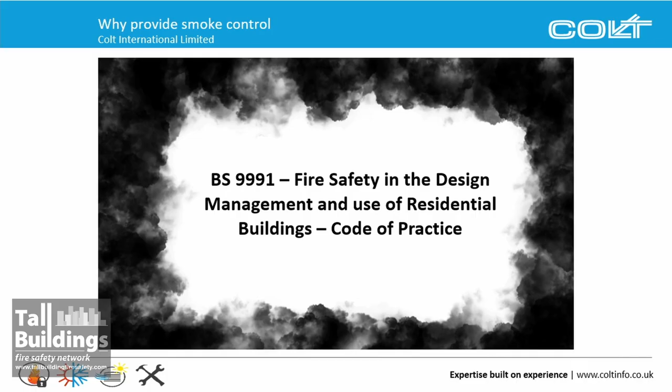Quite a mammoth task. It's a standard that will never be perfect, and people will always have an opinion on how to make it better. But fire safety in the design, management and use of residential buildings, a code of practice, it's so important. What we've talked about with Elspeth and Ben is the built environment and how people manage existing buildings, but this is how buildings are being built, and hopefully, having listened to some of the presentations this morning, we'll see that things are actually improving in the right direction.

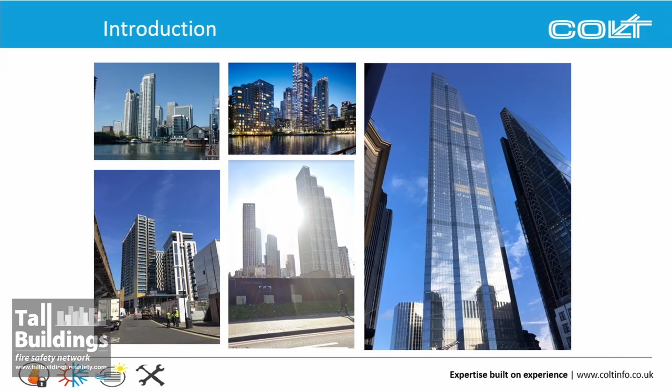So as buildings are getting taller, and so much taller, particularly when you look out the windows here, making sure that people can evacuate safely or are safe within the buildings is of utmost importance. So considerations and challenges for the committee start with the changes to legislation that we've had since the last version of the standard. Obviously, we have the Building Safety Act bringing in sprinklers over 10 metres, single-stair residential buildings up to 18 metres only.

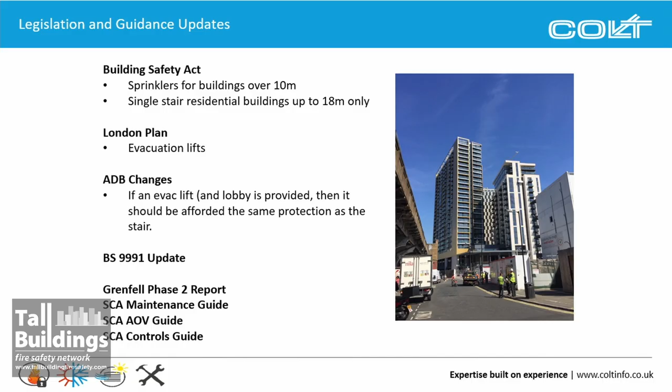The London Plan with evacuation lifts we've heard a lot about already. Changes to Approved Document B didn't go as far as saying we need evacuation lifts, but if you have one, then it should be afforded the same protection as a stair. Very sage advice, I guess, but no real content to it.

So now we've got the 9991 update, which has considered both the Phase 1 and Phase 2 reports, and the Smoke Control Association information on maintenance, which is coming out very soon. They put some guidance out on automatic opening vents and also on control systems for smoke control systems. And you'll guess, because of my background, that this is going to be a little bit of a smoke control orientated presentation, but I will try and cover the majority of the content.

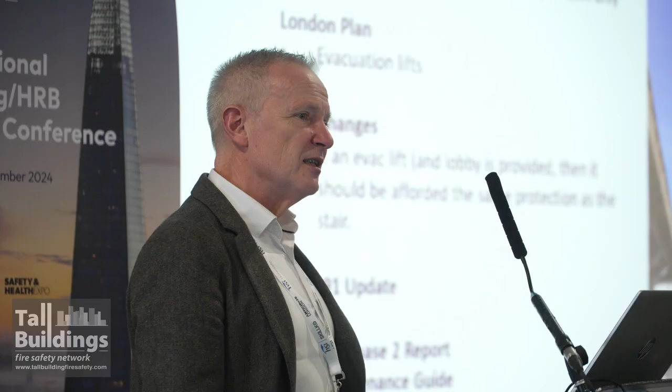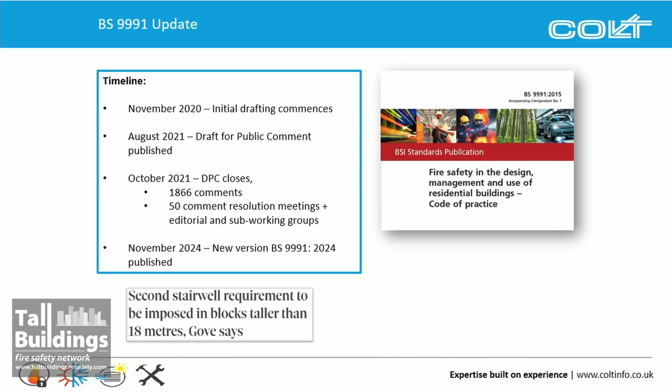So the standard went out for initial drafting in 2020 based on comments that had been received over the previous years. In August 2021, that drafting was complete and it went out for public comment. Just a couple of months later, the comment period closed with nearly 1,900 comments. A committee was set up to review those comments and either action them or justify why they wouldn't be actioned. That ended in 50 days of meetings, both editorial and technical, to resolve all those comments. Not all were taken on board, some were rejected.

But obviously, Michael Gove had already said that a second staircase would be required in HRBs greater than 18 metres. So from Paul's presentation this morning, that is within the standard. 18 metres is the cut-off limit that NFCC wanted, that RIBA wanted for residential buildings.

I've got to admire Russ's clairvoyance here, because it was back in April when he asked me to come and speak at this event, not knowing then that it would be published last Thursday. So it's very opportune to be speaking at this particular time.

And handily for me, at the beginning of the standard, I'm sorry about the small print, it does actually give us a list of some of the main changes. While it's a very brief list, the highlights would be that the scope's been expanded to cover residential care homes. There was a lot of vague guidance for residential care homes, so that's kind of been distilled out. So there's an absolute new dedicated section for residential care, and some definitions for residential care as well.

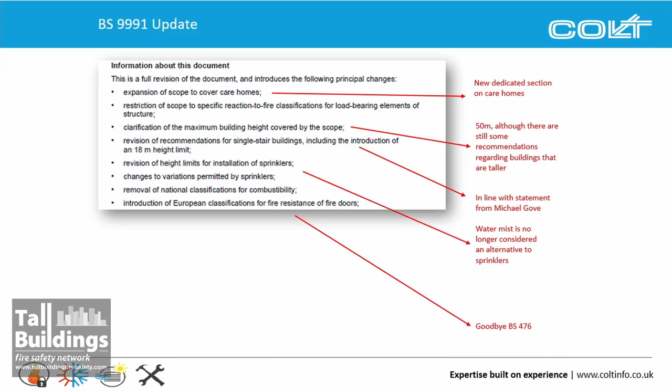Some of the standards, I'm sort of jumping around a little bit with them, is leading towards the demise of the BS 476 standards. While there are still references to them in the standard, they are kind of being phased out. So that covers the reaction to fire classifications for load-bearing elements as well.

There's clarification on the maximum building height covered by the standard. It is 50 metres, the maximum building height it will cover. There is some additional guidance within there for buildings over 50 metres. But once you go over 100 metres, it goes down the fire-engineered QDR type process. The big one, obviously, an additional staircase for buildings over 18 metres, in line with Michael Gove's statement.

And I guess it's easier to say what's not in here, and the one thing that's not in this standard is water mist. There was no agreement on how water mist could be designed in residential buildings without a test report that covered every single application, and so it was decided that we could not be recommending water mist within the standard.

One of the big changes, I think, really is the updating recommendations for smoke control, and the introduction of recommendations for evacuation lifts, which again is something that we're hearing a lot, both today but probably yesterday as well. So there is some more clarity within there as to evacuation lifts, how to plan for them and how to design for them. Basically, if you need a lift, or if a lift is provided to get into a building, then a lift should be provided to get out of the building. So it's level access for everybody.

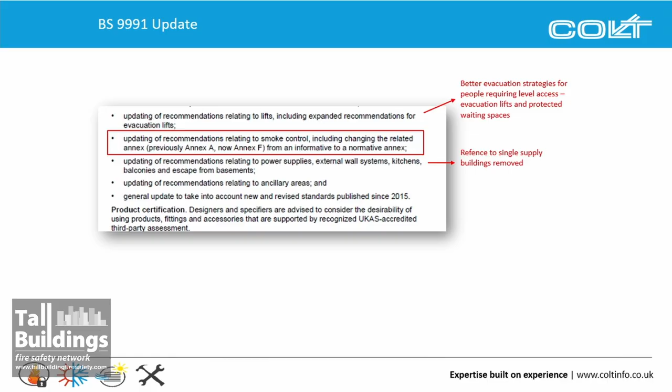And the other main change there really was the update of references to power supplies. Under the old version of 9991, there was a requirement for a standby power supply, but there were get-out clauses if you didn't think it was practical. Now there isn't a get-out clause for not providing a secondary power supply, be that from an alternative substation or from a standby generator.

A bit on product certification and some general updates. I mean, obviously it's quite a complex standard and it's really difficult to get all the details out of it in half an hour. So forgive me if I have jumped to the areas that I'm more familiar with, shall we say.

So dealing with means of escape, some areas haven't changed. Travel distances are pretty much the same: up to 11 metres, single stair, 4.5 metre travel distance with an automatic opening vent at the head of the stair or on every landing as we had before. From 11 to 18 metres, again, single stair is permitted with a travel distance of 7.5 metres, but obviously with most buildings being sprinklered. I'm sorry, some of the formatting seems to have gone astray in my presentation. So travel distances with sprinklers are 15 metres.

One of the significant changes is that travel distance is measured not from the apartment door to the lobby, but from the apartment door to the stair, which is a big change from the old standard, because we found there were a lot of people trying to game the system by putting a tiny little lobby outside the apartment or a great big lobby outside the staircase. So we were getting more and more travel that was kind of cheating, really, in terms of the intent of the limit of travel distance. So now that travel distance is measured from the apartment to the stair door.

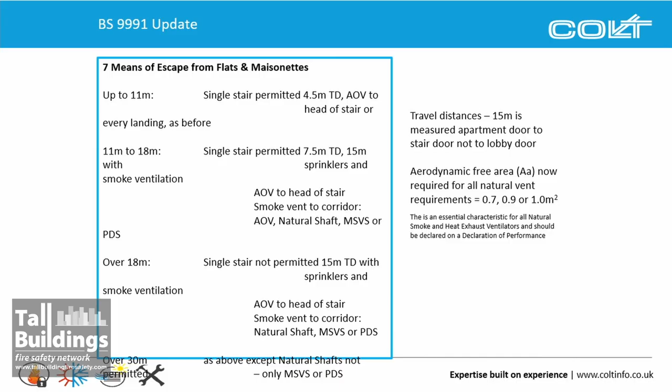So in our 11 to 18 metre range, we can have an AOV to the head of the stair. We need smoke ventilation to the corridor, which can be AOVs on an outside wall. By AOVs, I mean automatic opening vents. It can be a natural shaft within the corridor with dampers on every level, or a mechanical smoke vent system, or a pressure differential system.

Once we go over 18 metres, obviously, now we're into the range of multiple stairs, and the same requirements apply. We're no longer permitted a single stair, but 15-metre travel distances and the same ventilation requirements. What you possibly can't see at the bottom is that over 18 metres, the automatic opening vent to the corridor has now come out.

So that's not an option. If a smoke control system is designed to keep the staircase clear of smoke, or to provide an ability to vent smoke out of the building, there was no evidence to suggest that in taller buildings, where wind pressures may be more prevalent, AOVs provide a sufficient level of performance to assist escape.

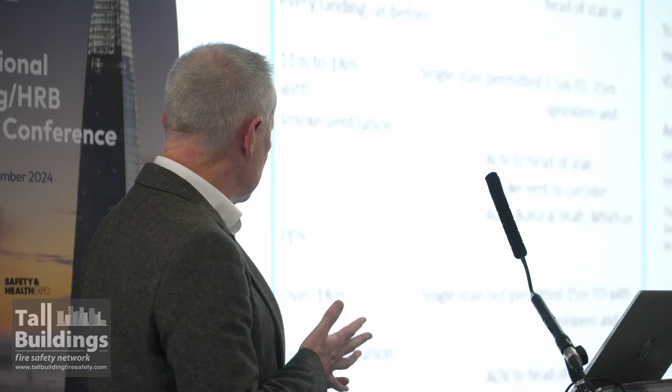So natural smoke shafts, mechanical systems or pressure differential over 18 metres, and then over 30 metres, again, the natural shafts have been taken out. It's only mechanical or pressure differential systems over 30 metres.

And a change to the requirements for automatic opening vents is that we've gone from having this concept of minimum free area that appeared both in Approved Document B and the old standard, which was a very vague calculation of what we thought the area of the ventilator might be, to a defined classification of the aerodynamic free area, which you establish by putting your product in a wind tunnel and measuring its performance. And that's part of the classification of the product that would be a certified product.

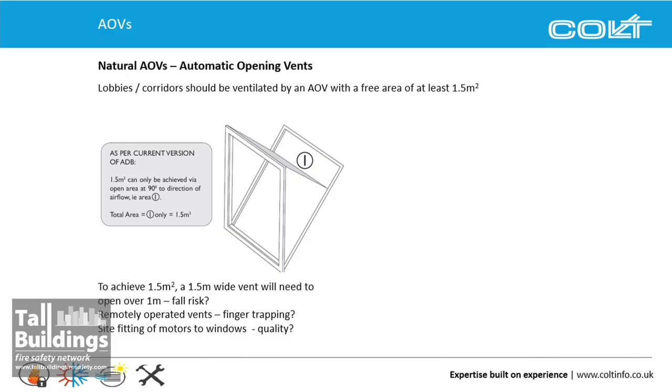And one of the drivers for this was to stop people taking a chain drive, sticking it on a window and calling that an automatic opening vent. It's not, and we'll cover that. The old standard said that area, or area 1 on that diagram, would be the minimum free area. So if you wanted 1.5 square metres minimum free area, you needed a 1.5 metre wide vent that opened a metre.

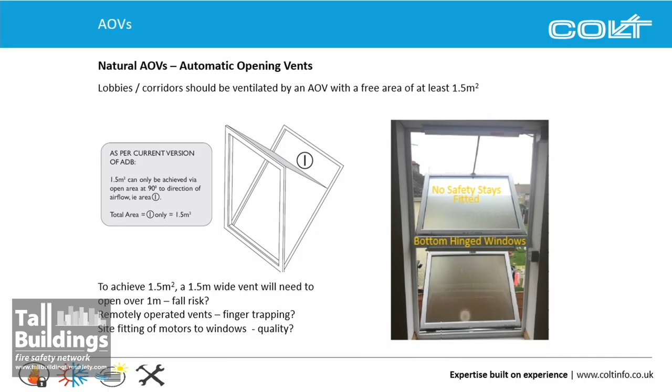That led to a whole load of issues with, as I say, people putting chain drives on normal windows, which not only have limited performance, but also, in the example you see, there's no safety stays, so if the chain drive becomes disconnected, it could fall, shatter, and harm people at low level. There's no control in regards to finger trapping, not always a problem, but obviously there's a real quality issue.

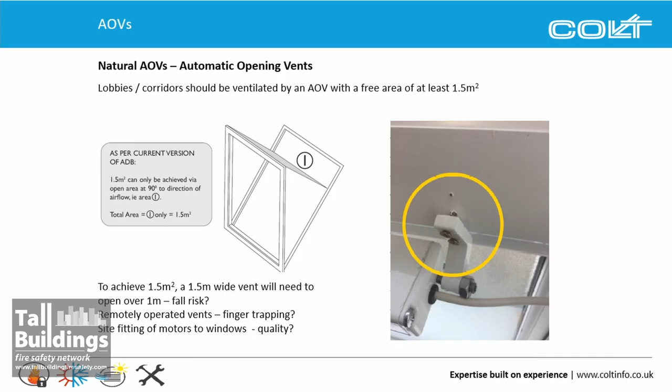And when you see some of the actuators fixed to PVC surrounds or timber frames, the ability of these to perform over a long period of time is quite limited. So the aim was to get away from, I don't want to use the phrase Heath Robinson, but on-site constructed ventilators to proper certified product. So we didn't have these great big sheets of glass hanging by a couple of Tek screws.

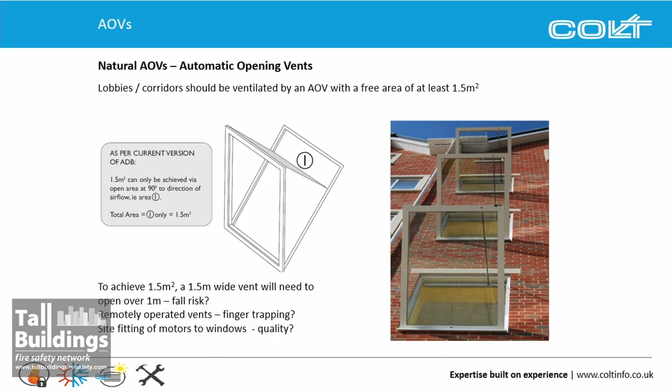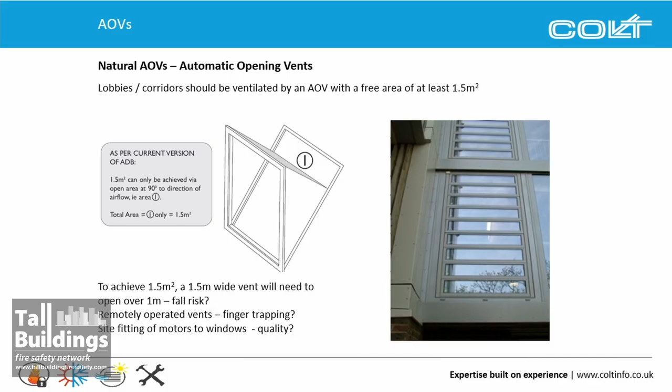So a smoke control ventilator is CE marked to a standard, and that aerodynamic free area is part of the declaration of performance for that product. The components are tested together for reliability, robustness, resistance to heat, and if they're on the roof, to be able to throw off snow and to operate under wind. So it's quite a key change to move away from, as I say, chain drives and windows.

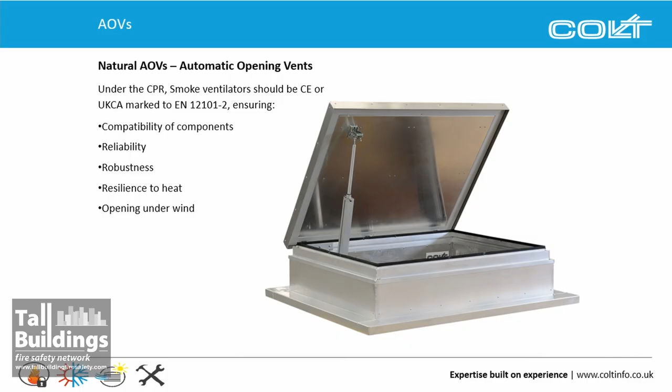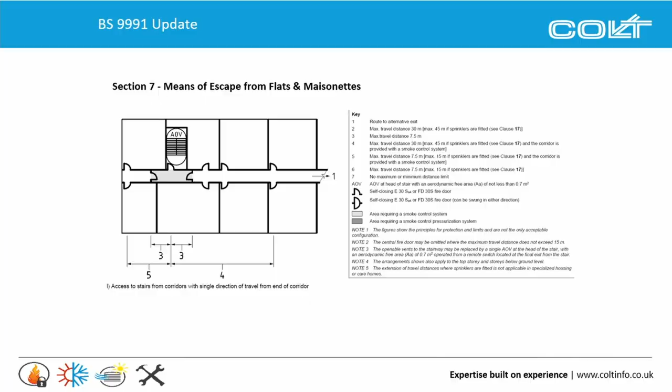So where do we use these? Obviously, this is the corridor. We've got a staircase at the end of the corridor. The furthest apartment to the staircase, assuming it's over 11 metres and sprinklered, will be 15 metres. The shaded area is where the smoke ventilation is provided, and as I say, the travel distance is to the stair door, not to the lobby.

A couple of points on section 7, which covers lifts and evacuation lifts. Buildings that are provided with passenger lift access to an upper or lower level should also be provided with a means of using lifts for escape. As I say, you need a lift to get in, you've got a lift to get out. And then at least one evacuation lift should be provided for each escape stairway. So you've got 2 stairs, you need 2 lifts. There is a possibility of putting that alongside firefighting lifts, which will become clear as you start to design buildings to the standard.

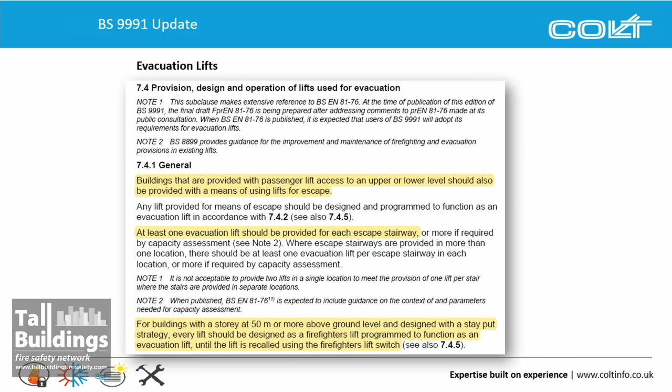A couple of other things to point out there. For buildings with a storey 50 metres or more above ground level and designed with a stay-put strategy, every lift should be designed as a firefighter's lift, programmed to function as an evacuation lift until the lift is recalled by the firefighters. So there's some extra resilience there as well.

It does obviously beg the question, how do you design an evacuation lift? And of course that doesn't quite exist yet. And note 2 there refers to BS EN 81-76, which is the evacuation lift standard, which is being rushed through the CEN process as we speak, hopefully. Because it is very hard to get lift manufacturers to certify a lift that doesn't do what it was originally designed to do, which is ground in the event of a fire.

When we look at the position of the lifts, there are a number of issues, because every lift should have an evacuation lift lobby or waiting space. I'm not sure the exact term we call it, but in each of these examples we can see different requirements. So in the top one, the lift is actually in the staircase and the waiting space is in the stair. In the second one, the lift is in the lobby. Again, the smoke control is in with the corridor lobby as well.

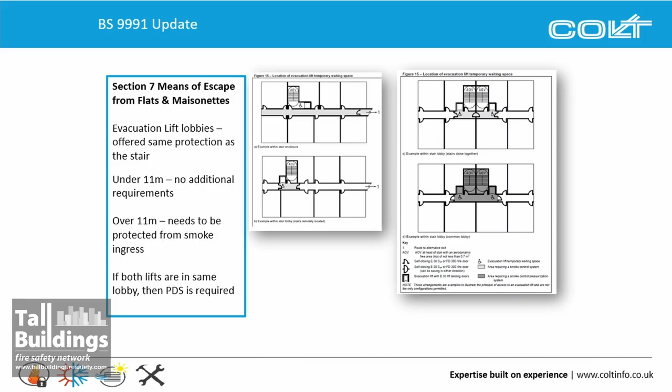In the top right one, we've got the two staircases side by side with a door in between. We've got two staircases, we've got two lifts, and we've got two waiting spaces. So again, normal smoke control requirements apply to that one. In the final one, they've taken out the door between the two lift lobbies. In that instance, it's requiring pressurization. So a pressure differential system will be provided when there's no separation between the two evacuation lifts.

So what does that mean? So the evacuation lift lobbies, or the waiting spaces, should be offered the same protection as the staircase. So if it's below 11 metres, we're not really offering a great deal of protection from a smoke control point of view to the staircase, so there's no additional requirements for the evacuation lift lobby in that instance. When we go over 11 metres, the premise of the smoke control systems that we're designing is to protect the staircase from smoke ingress. So the add-on is that if you've got a system that protects the staircase, it's now got to protect the lift lobby as well.

So that means we can no longer extract from that lobby. You've got to extract from the space beyond the lobby and either have inlet air coming into both the stair and the lobby, or pressurize the two. So I think what we need to understand really is which of these is the architects' preferred option. And I think there's going to be a big question about net versus gross when these start to be introduced into new buildings, and which of these options is the most viable solution.

Because at the moment, as writers of the standard, it's not clear to us how that will be taken on board. Because obviously, once all these are introduced into the building, the way to recover the additional cost, I guess, is to make the building higher. So things will eventually get a bit taller.

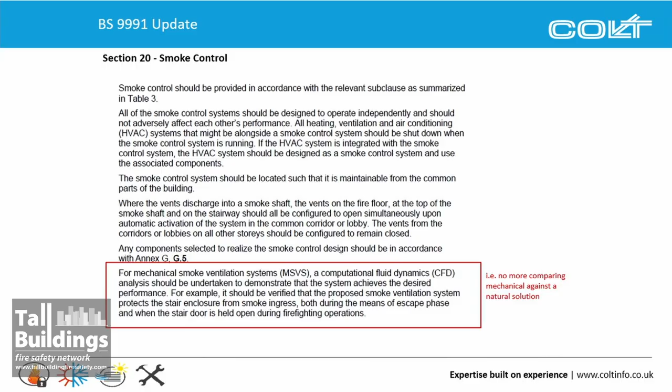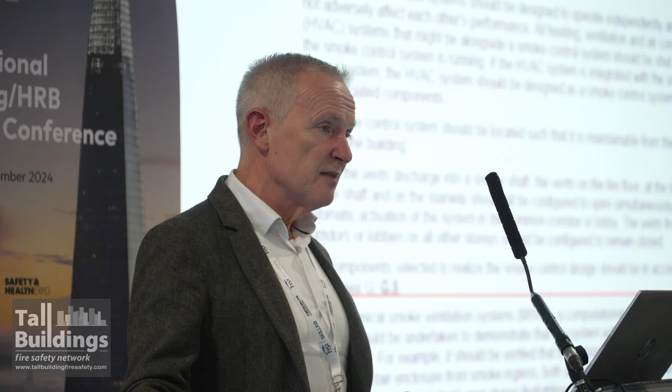So for smoke control, some big changes as well. It used to be in 9991 and in 9999, I think, that if you were putting a smoke control system in and it was going to be a mechanical system, you had to design it to be at least as good as the equivalent natural system. So the process would be, you'd calculate how good a natural AOV or a natural shaft would perform, and then you would provide a mechanical system that would do the same thing. So if it didn't perform very well, the mechanical system could be just as bad, but it wouldn't be any worse.

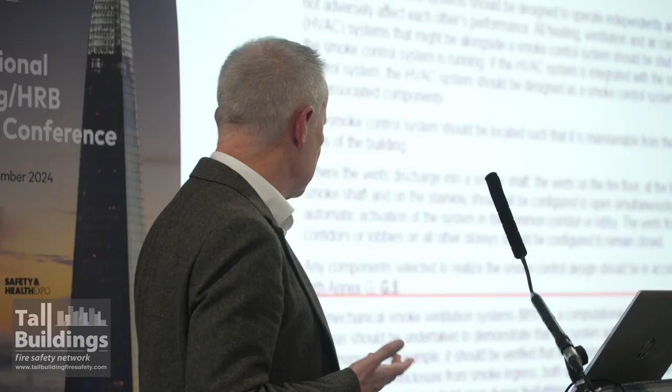Now what we're saying is that mechanical smoke vent systems need to be designed to keep the staircase clear of smoke. It's not comparative anymore, it's definitive. So that really means more modelling, I guess, and demonstrating that the performance of the system achieves the conditions we're trying to achieve. And then, Paul, I'll refer to your presentation earlier with your smoke going into the staircase. We're designing these systems to keep that smoke out of the staircase. Okay? So if you change your animation, that'd be great.

And obviously, when we look at Grenfell and the comment about the smoke control system not working, there's no evidence to suggest that the smoke control system didn't operate. It was never designed and would never have been designed for a fire of that severity.

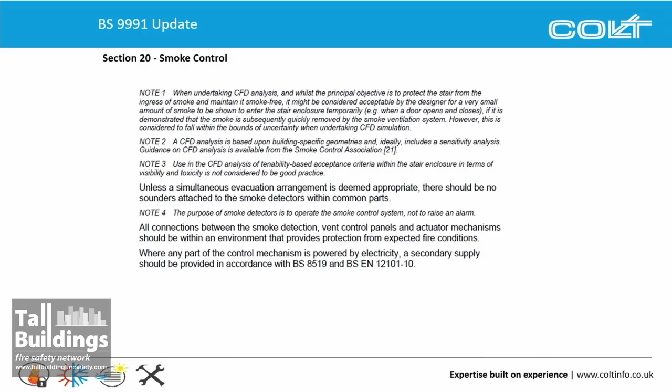So there is some guidance on CFD, and there's a lot of small print here. I've put it in so you can refer to it in the handouts. I don't suggest that we go through it, but obviously when you're doing CFD analysis, making sure that it is of the right standard and it's done by reputable and competent people is the critical point there.

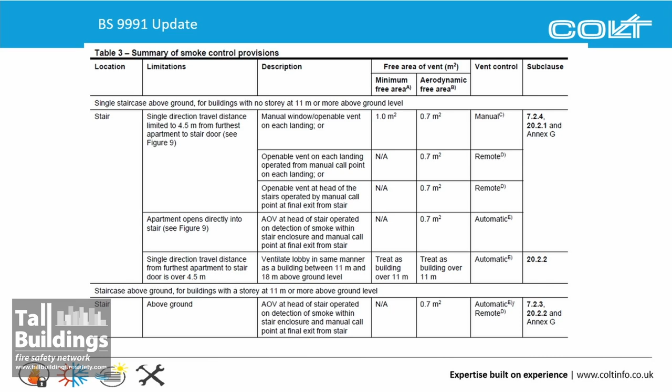So into the smoke control provisions, as I say, the requirements are very similar to previously in terms of automatic opening vents or natural shafts or mechanical shafts, but now we have these aerodynamic free areas that actually means you need to use a properly designed piece of equipment rather than just a window with a chain drive.

And the other big change is that when you get to a basement level, if your basement is more than 10 meters deep, this got lost from both 9999, I think, and 9991 before, that a deep basement could be given the same protection as any other level. It used to be that a deep basement would have staircases protected by a pressure differential system, and so now that has been reintroduced.

How it got lost from the last version of the standard is very difficult to tell, but it is now back in there, because going into a deep hole in the ground with only a staircase to get back out again to fight a fire is quite a terrifying procedure. I wouldn't like to be there myself, so having the best possible protection to that staircase is essential.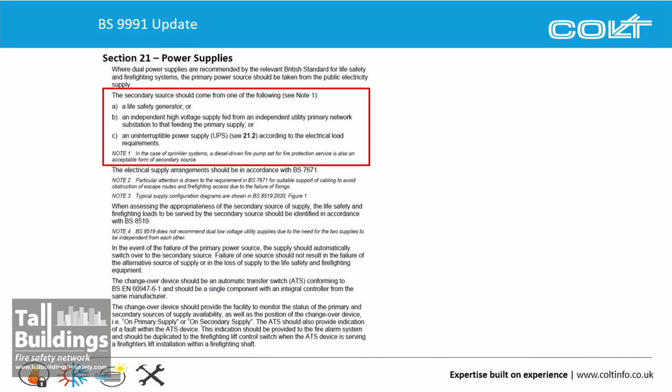Just to go over the other things that we mentioned, AOVs up to 18 meters only, natural shafts up to 30 meters only. After that, it's either mechanical or pressure differential. As we said before, power supplies: the secondary power source now should be a generator or an independent feed or a UPS. There is no option to say, well, it was too difficult, so we don't do it. It's got to be there.

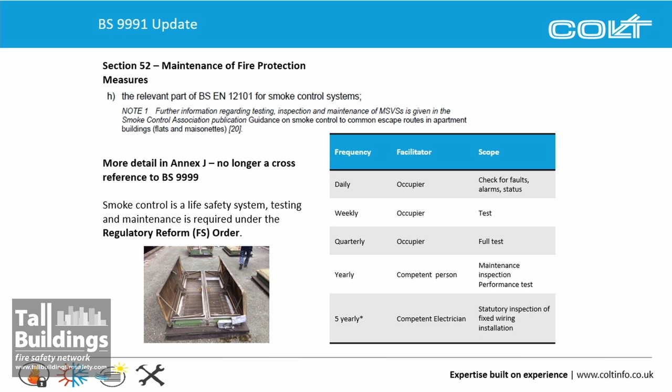Quite a bit on maintenance now. It used to be that 9991 used to refer to other standards for maintenance. It's now got its own requirements in there. And obviously smoke control, being a life safety system, testing and maintenance is a requirement under the Fire Safety Order. So what we recommend as a business, and as an association really I suppose, is that there should be daily inspections of the smoke control system, as you would with a fire alarm, just to make sure there's no faults, no flashing lights, no red lights on it, that it's ready to function.

And every week, a test, and these can be done by the occupier, the responsible person, I guess, and then every quarter a full test of the system. So if you've got a high-rise residential building with multiple floors, you test so many floors a week to make sure that over that cycle of three months all those floors are tested. And then once a year, a full maintenance inspection and performance test by a competent service provider, and obviously a 5-year electrical inspection as well.

But the competent service provider, obviously making sure that not only is the system operational, but that a sample of the cause and effect is carried out to make sure that the right system works on the right level, and it's tested from the fire alarm as well. There's a big scope gap in maintenance and testing, that people test their own things and they demonstrate it's working by pulling out the links to the fire alarm. That doesn't really prove that the cause and effect from the fire alarm is giving the right signal.

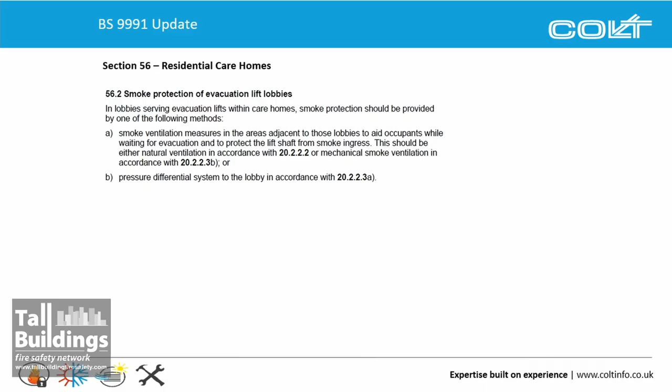As I say, residential care homes, there is a whole section 56 on residential care homes. And one of the things that is in there, it deals with progressive evacuation, but it also introduces smoke protection, including evacuation lifts for residential care homes. They've been quite neglected from what I can tell in sitting on this committee.

I won't dwell on it, but there is a simplification of the design decision tree for atria, particularly if your evacuation is through the atria or along the balconies of the atria, then that leads you to a more onerous solution.

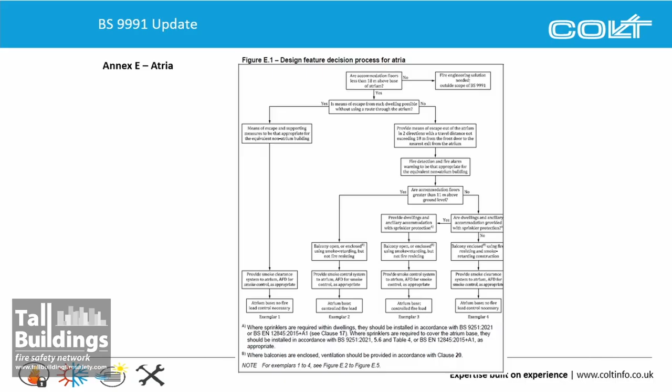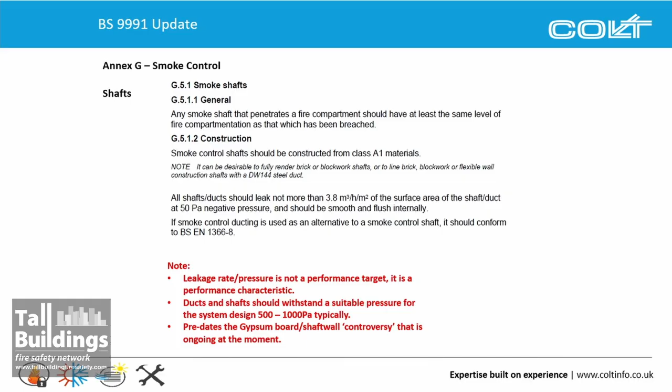Smoke shafts, big topic at the moment. Ever since British Gypsum, I think it was, withdrew their classification for shaft wall for the design of smoke shafts, there is a big controversy going on as to how smoke shafts could be constructed. Everyone thought shaft wall, the clue was in the name, it could be used for smoke shafts. British Gypsum have turned around and said, well, no, we've never actually tested it at high pressure, so we don't really think it should be used for smoke shafts.

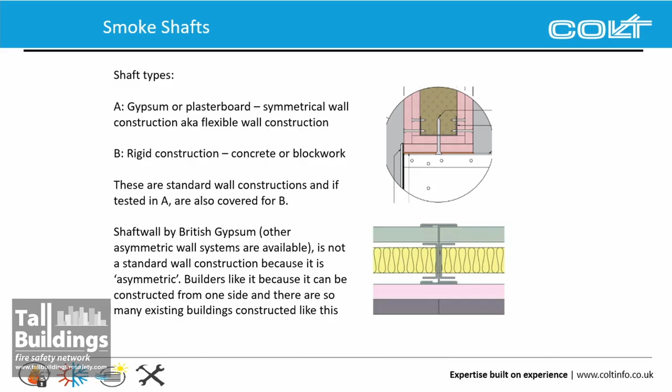For those that are not familiar, a normal gypsum or plasterboard wall would be a couple of sheets of plasterboard around a steel section, which is symmetrical. It's the same in both directions, and it will generally withstand a reasonable amount of pressure and will be fire rated. A rigid construction would be concrete or blockwork, but a shaft wall is a form of gypsum board that can be installed from one side only. So it's really handy for contractors to build, particularly shafts, but it's not a standard wall construction because it's asymmetric. So you have to test every single variant of it to prove that it offers what you want. But one of the tests that has never been carried out is pressure testing.

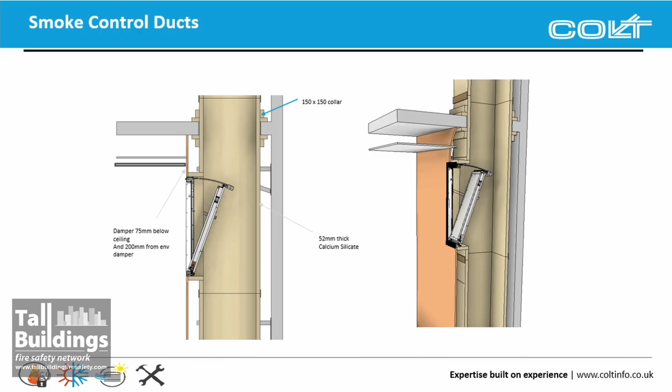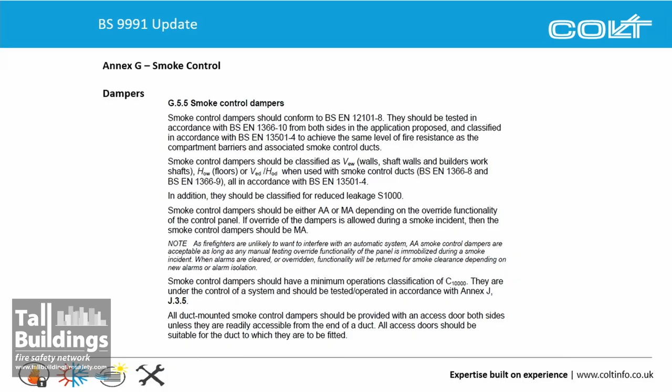I won't dwell on it too much, but the guidance really is from the Smoke Control Association, and it seems to be coming from the ASFP now, and the finishes and interiors sector, that your shafts should now be provided by either smoke control duct that is tested in both directions, or from concrete. So that's another shaft within a shaft, and there's a whole load of questions about how you detail that in terms of what's required. And something that has crept into 9991 is some classifications for smoke control dampers. There's a lot of detail in there compared with some of the other areas of the standard, but again, making sure that the right product is used in the right application.

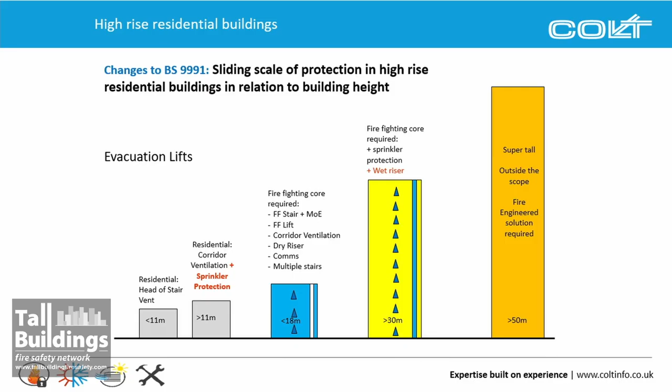So, starting to recap, when we've got our small buildings under 11 metres, our smoke control requirements are single stair, head of stair ventilator. Once we go over 11 metres, we now introduce sprinkler protection. Once we go over 18 metres, we're up to 2 stairs, and we're losing these automatic opening vents. When we go over 30 metres, obviously we've got the wet riser in there now as well, but also we're losing the natural shafts. And then anything beyond that is either mechanical ventilation or pressure differential systems.

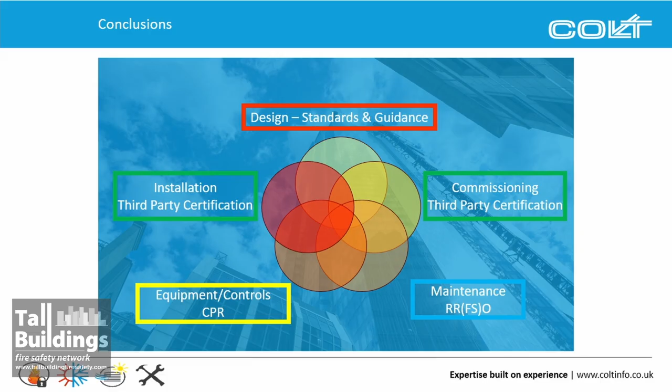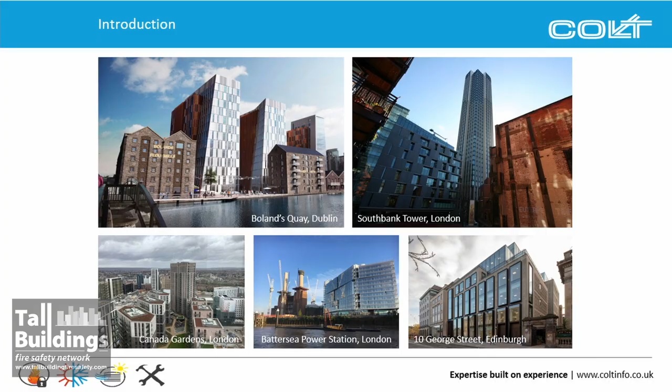Commissioning, again, that can be part of a third-party certification scheme, but it's so important that the commissioning is done in the right way and is total. But that's all well and good. You've got a fully installed system ready to go, and Gateway 3 is what is supposed to confirm that. But once the building's handed over and delivered to the owner-occupier, the maintenance comes into it, and it's so important that the maintenance is carried out, recorded, and done in a professional manner. So that all these buildings are as safe today as the day they're finished, and hopefully they don't have a fire.